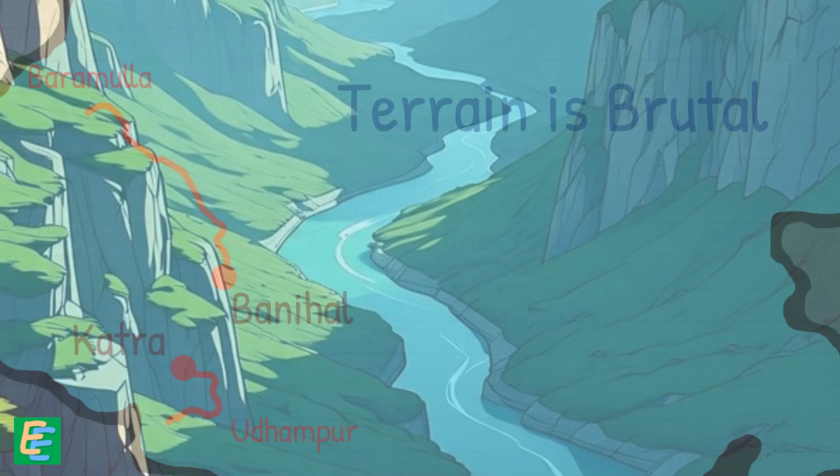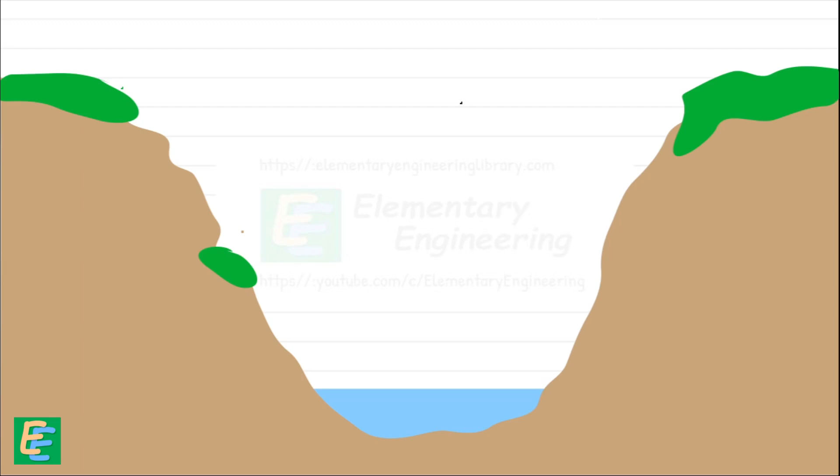The stretch between Katra and Banihal, where the terrain turns brutal. And right in the middle of that stretch, the Chenab River Gorge. Here, the river doesn't just flow, it slices deep into the mountains, carving a gorge nearly 360 meters deep. To give you an idea, that's taller than the Eiffel Tower.

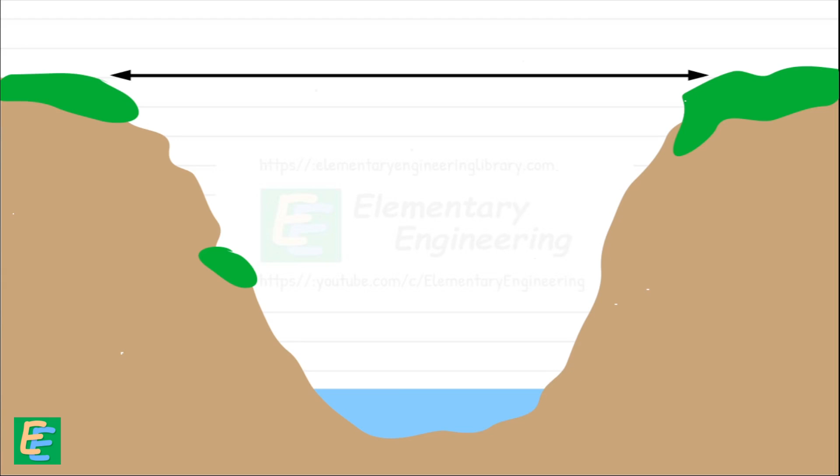And building a railway across that, across roughly half a kilometer, it was like staring into an unwritten chapter of engineering history. There was no feasible way around it. Every meter of rail laid, every tunnel bored, every other bridge constructed, all converged on this single unavoidable crossing. But it wasn't just the sheer mind boggling depth that made the site so difficult. It threw every possible natural obstacle at the engineers.

First, the geology here is incredibly complex and volatile. The entire region lies in an active seismic zone, meaning earthquakes are a very real threat. The rock here is fractured, unpredictable, and prone to landslides. Building foundations strong enough to stand for over a century in such unpredictable ground was a monumental task.

Then there was the weather. The region experiences extreme temperature swings, from intensely hot summers to brutal sub zero winters. And the winds? They can whip through that gorge at a speed of up to 266 kilometers per hour, strong enough to derail a train if not accounted for. Any structure here would need to be incredibly robust. And finally, the sheer remoteness of the location.

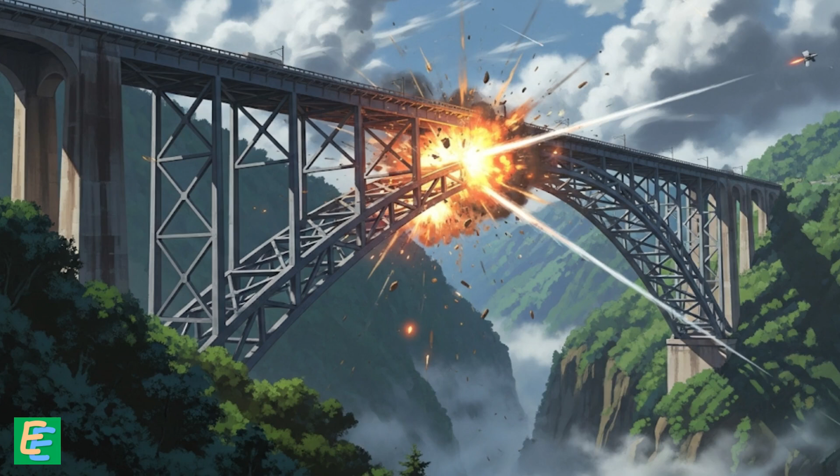This bridge lies in a geopolitically sensitive region, not far from the India Pakistan border. In the unfortunate event of a conflict, such a vital artery could quickly become a strategic target. So the bridge had to be designed not just to survive nature, but also sabotage or enemy attack. So the big question was, what kind of bridge could even survive here?

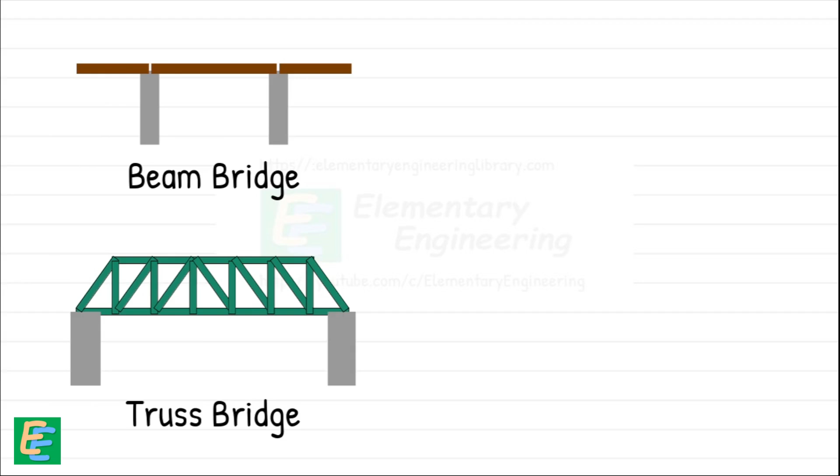Engineers explored all kinds of options available to them, meticulously studying every possibility, from the solid beam bridge and the interwoven truss bridge to the elegant suspension bridge and the modern cable stayed bridge. But nearly all of them shared one fatal flaw. They would have required immensely massive support piers or exceptionally tall pylons.

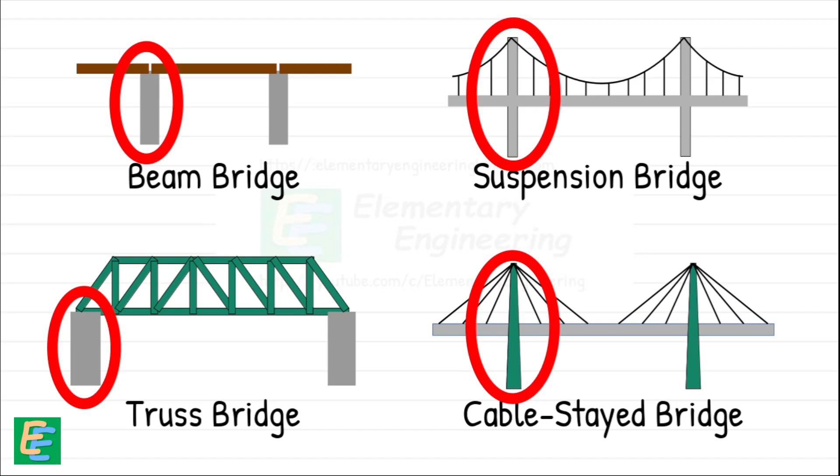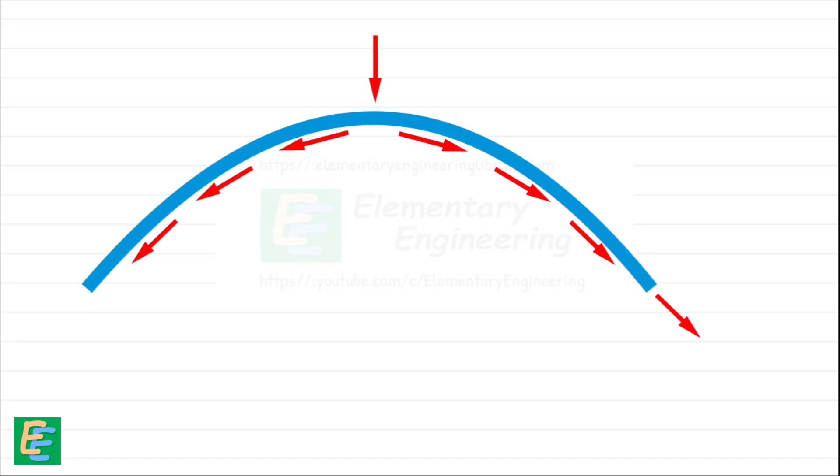So the engineers turned to a different, ancient, yet incredibly powerful structural form, the arch bridge. Why an arch? Well, an arch is a natural marvel of efficiency. Imagine placing a weight on the top of an arch. It efficiently channels that downward force along its curve, converting a significant portion of it into a powerful outward push, also called the thrust, at its base.

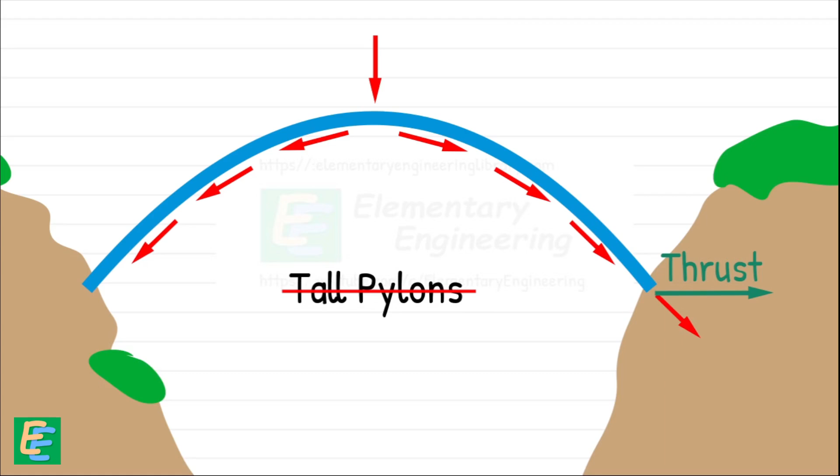This outward force then gets transferred into the sides of the gorge, right where the arch touches the mountains. That's the key. The arch doesn't need any support in the middle of the gorge. No tall pylons, no vulnerable piers. Instead, its entire weight is transferred into massive, reinforced foundation blocks called abutments built into the rocky wall on both sides.

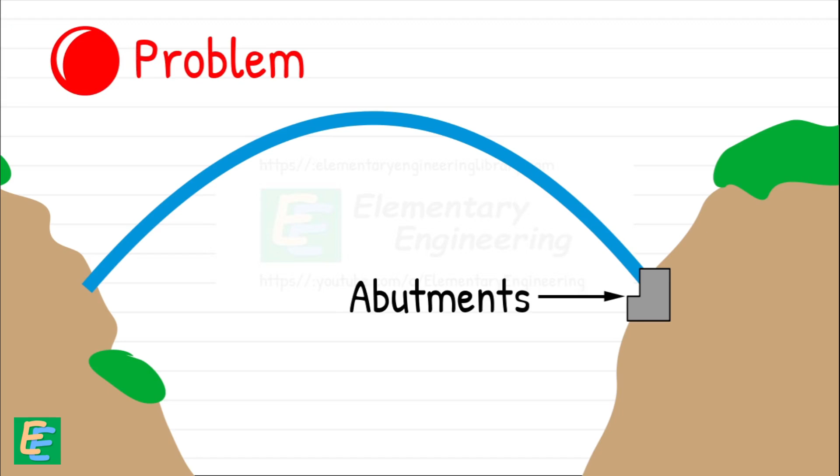But there was a problem. The gorge walls, which were supposed to hold up the entire structure, were not made of solid rock. They were fractured, layered, and geologically unstable. But the engineers, as always, had an idea. And so the extraordinary construction of the Chenab River Arch Bridge began.

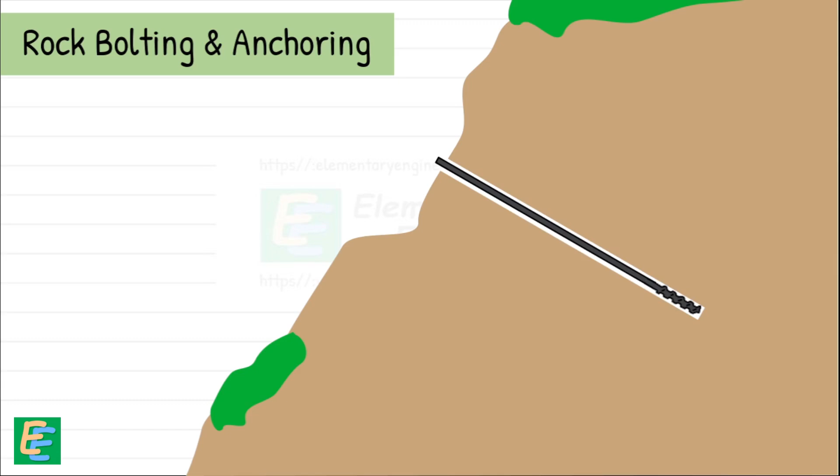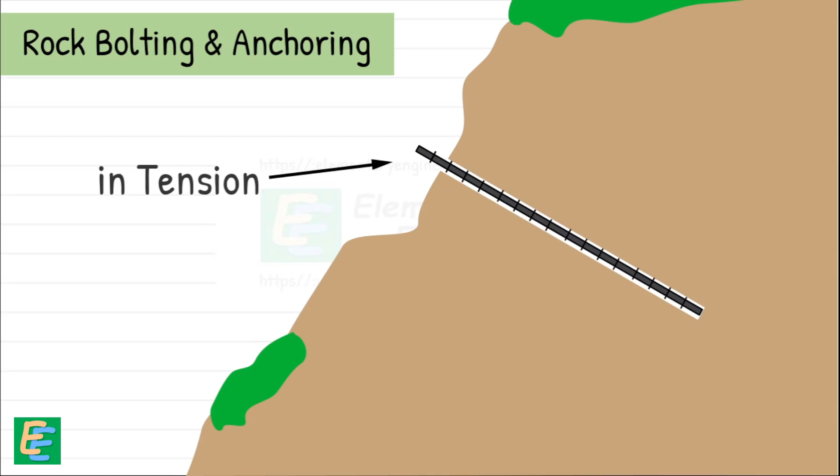Engineers began by creating a stable foundation for the bridge. They basically employed three main techniques to stabilize the fractured rock wall. First, they used rock bolting and anchoring. Engineers drilled deep into the fractured rock, sometimes up to 30 to 50 meters, and inserted high strength steel rods. These rods were stretched, so they were in tension, and then permanently grouted in place.

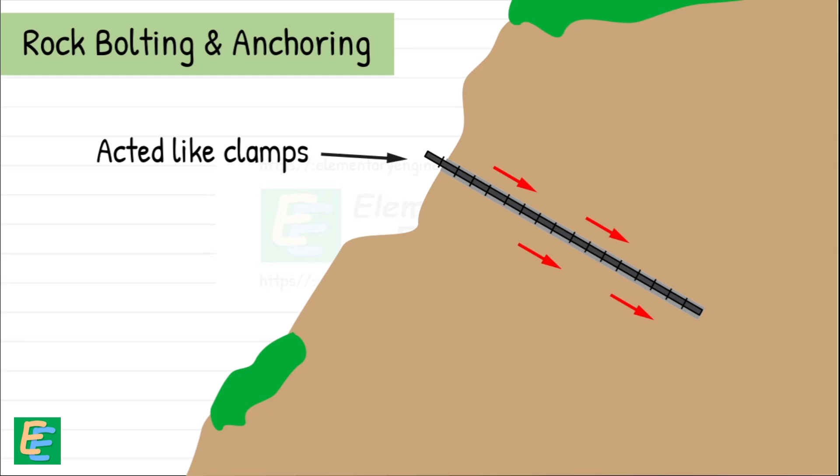Once released, they acted like powerful clamps, pulling loose layers of rock together and making the entire rock mass significantly stronger. Second, they implemented grouting. This involved injecting a special cement based mixture known as grout under high pressure into every tiny crack and fissure within the rock. This grout fills all the voids, binding the fractured rock together into a far denser, stronger, and more unified block.

Third, for the exposed surfaces, they applied layers of steel mesh and then sprayed them with a special concrete applied at high velocity called shotcrete. This created a protective skin, preventing further erosion and weathering.

But wait, did you wonder how engineers even got materials and machinery to a near vertical gorge face, hundreds of meters above the river? That too was one of the major challenges they faced. Before any actual construction could begin, they had to solve this basic problem of access.

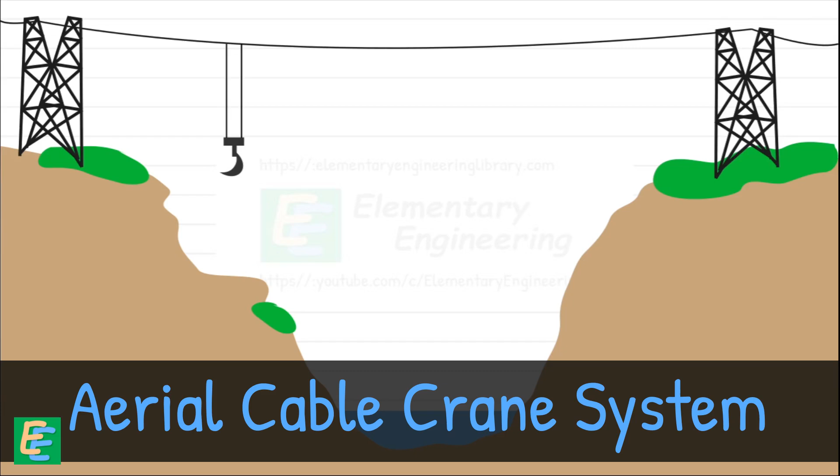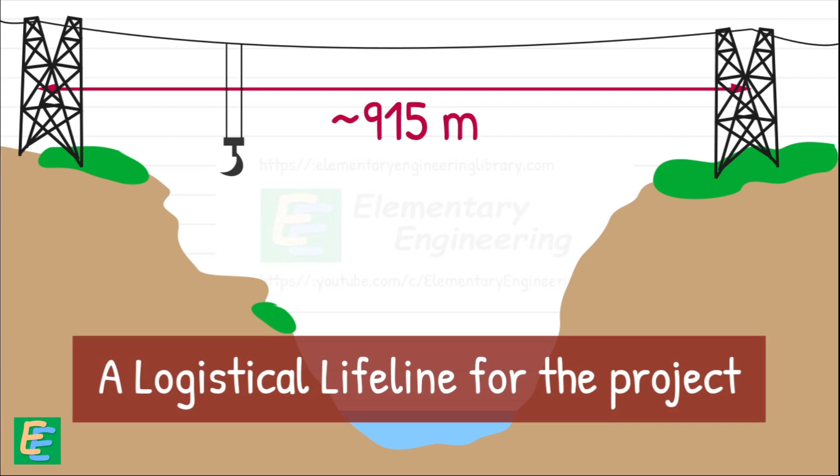To solve this, they installed a temporary aerial cable crane system across the gorge, spanning nearly 915 meters. This cable crane became the site's logistical lifeline, delivering everything from rock anchors and grout to rebar, scaffolding, and formwork.

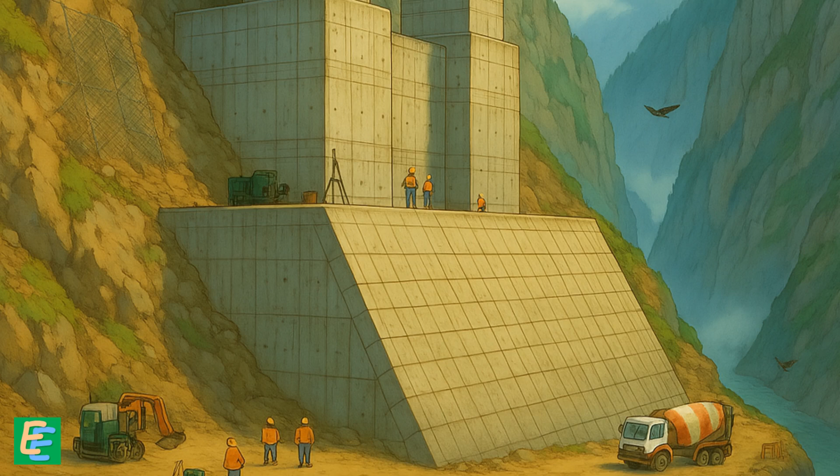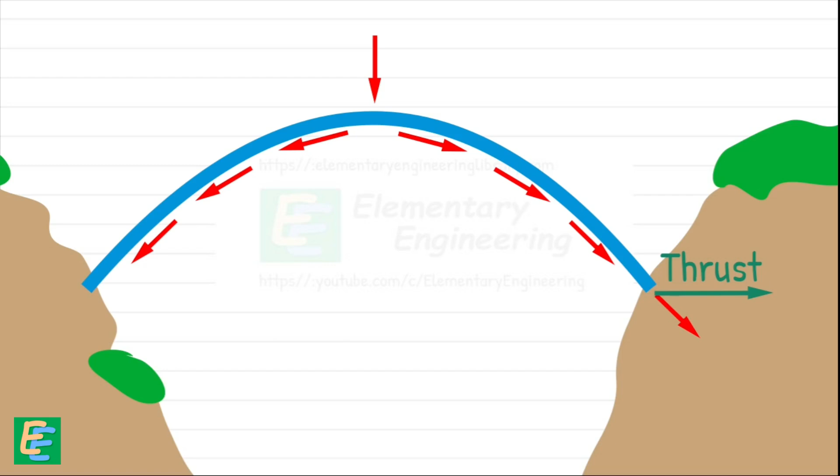Once the gorge walls were stabilized, the next step was to build the abutments, the massive foundation blocks at either end of the arch. These aren't just supports, they are the points that absorb the enormous outward thrust of the arch and transfer it deep into the mountain. To achieve this, engineers excavated large pits into the strengthened sides of the gorge.

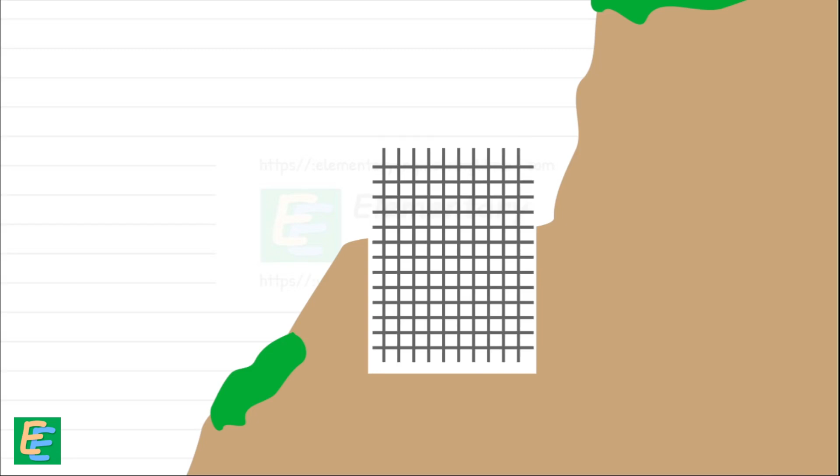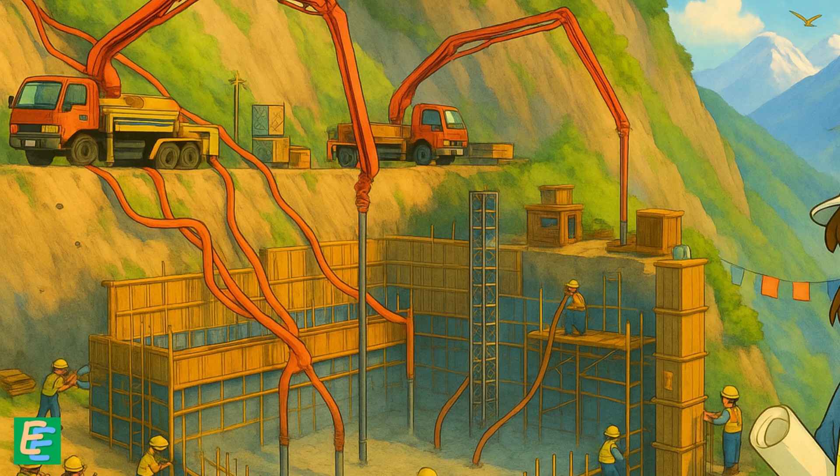Dense cages of steel rebar were meticulously assembled inside, forming a rigid skeletal framework. Then, using high pressure pumps and pipelines, high strength concrete was poured layer by layer into these forms, creating the stable foundations the arch and the other piers would eventually rest upon.

Next, engineers constructed a series of tall, straight vertical steel piers rising from the abutment zones. They were built first because they had a crucial job to do during the construction of the arch.

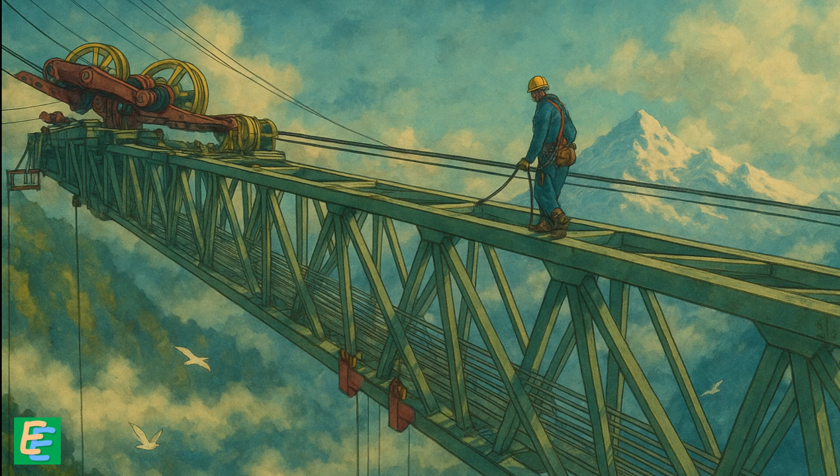Now the time had arrived to build the arch itself. But how do you build something so immense, high in the air with no support from below? For this, engineers turned to a method called cantilever construction. They started building the arch outward from both sides, little by little, until the two halves would finally meet in the middle.

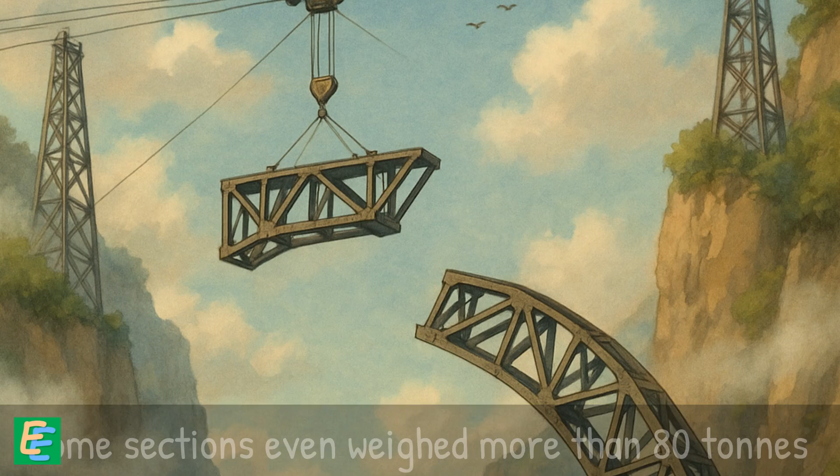From both ends, prefabricated steel truss segments were lifted using the cable crane system and assembled section by section. Some of these sections weighed more than 80 tons. Once in place, they were held by temporary stay cables anchored to the previously erected piers and to the slopes above. Each section had to be perfectly aligned, then welded or bolted with incredible precision.

For nearly 5 years, these two halves of the arch slowly crept towards each other. And finally, on April 5th of 2021, the final segment was inserted at the crown. The two ends locked together and the structural arch was complete. In the next phase, vertical steel members called spandrel columns were installed, followed by the bridge deck itself. Finally, the railway track was laid atop this platform.

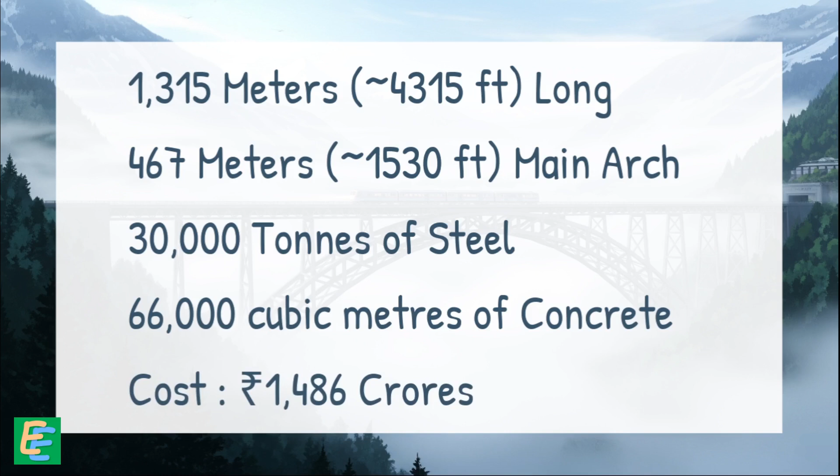With that, a 1,315-meter long bridge featuring an iconic 467-meter main arch span, built with an incredible 30,000 tons of steel and anchored by 66,000 cubic meters of high strength concrete, and that cost around 1,486 crores of Indian rupees or nearly 180 million US dollars, was finally ready. An idea once thought impossible now stood in solid steel.

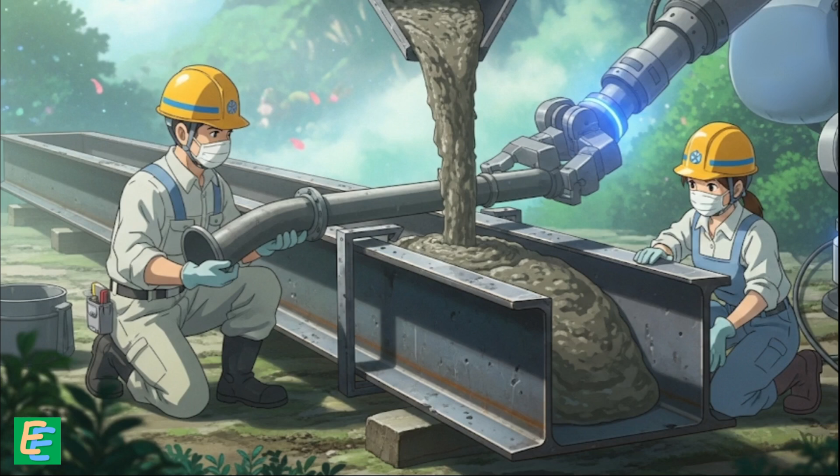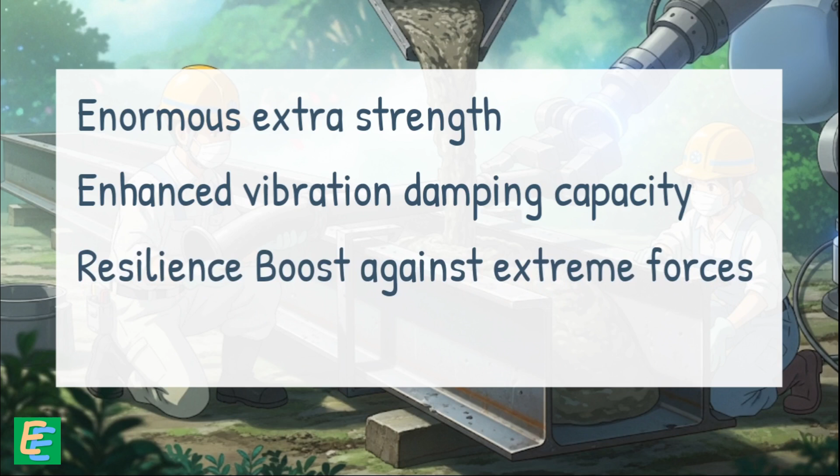But here is what makes it even more extraordinary. The Chenab Bridge wasn't just built to stand tall, it was built to survive the unthinkable. The steel arch itself isn't hollow. Its massive ribs are filled with concrete inside, giving it enormous extra strength, enhanced vibration damping capacity, and significantly boosting its resilience against extreme forces like blasts or fire.

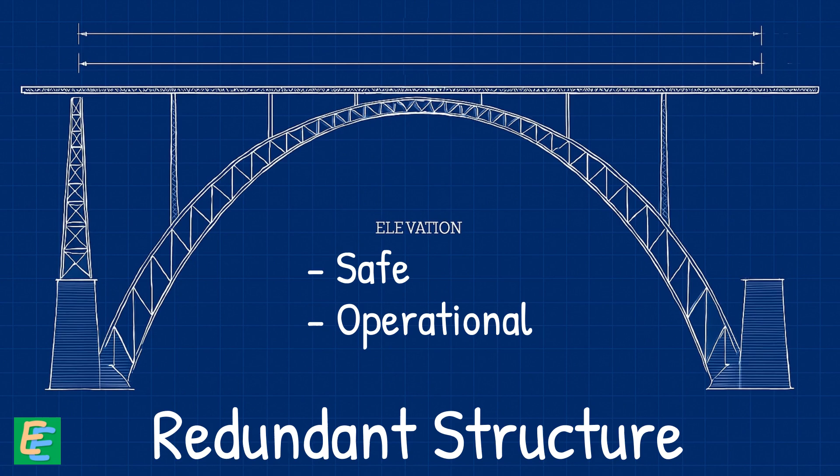And the entire structure was designed with redundancy, meaning if one component fails, others can carry the load and the bridge will still be safe and operational. Even the paint isn't ordinary. It's a special corrosion resistant coating developed to last 15 to 20 years, shielding the steel from the extreme Himalayan weather.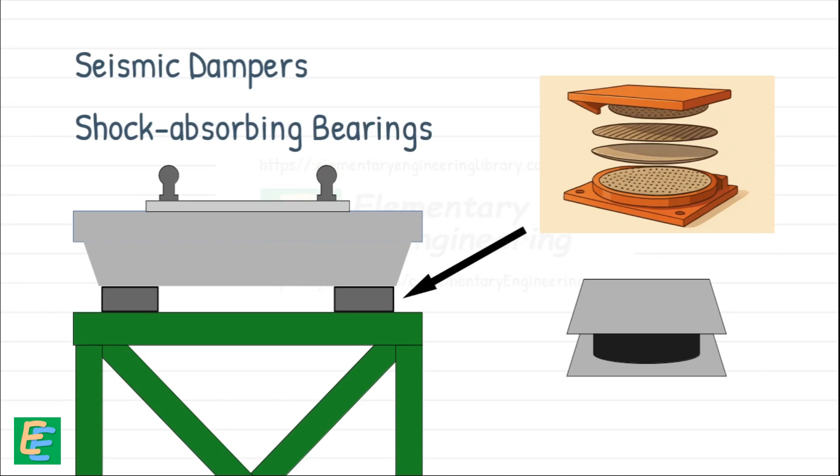Also, the region lies in seismic zone 5, the highest risk earthquake zone in India. So the bridge uses seismic dampers and shock absorbing bearings to handle vibrations. Including that, the arch shape itself helps distribute loads more efficiently, naturally improving earthquake resilience.

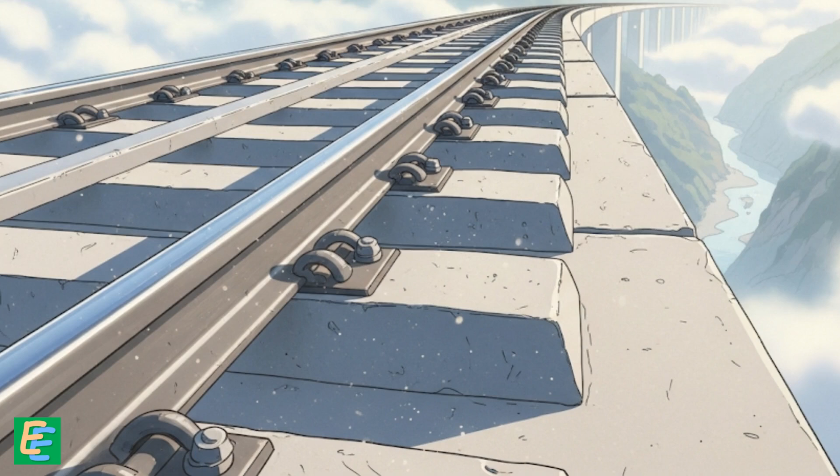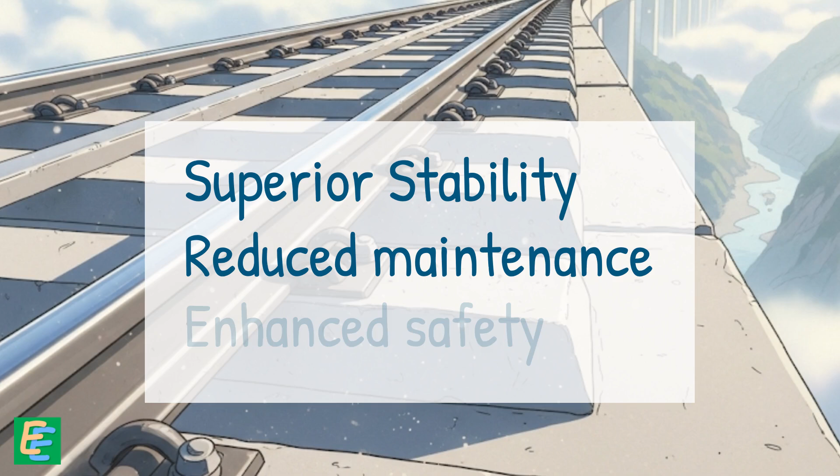And for the railway track itself, they employed a modern zero ballast system. This means there is no traditional ballast or crushed stones underneath. Instead, the tracks are directly fastened to the concrete deck, offering superior stability, reduced maintenance, and enhanced safety on this critical high speed link.

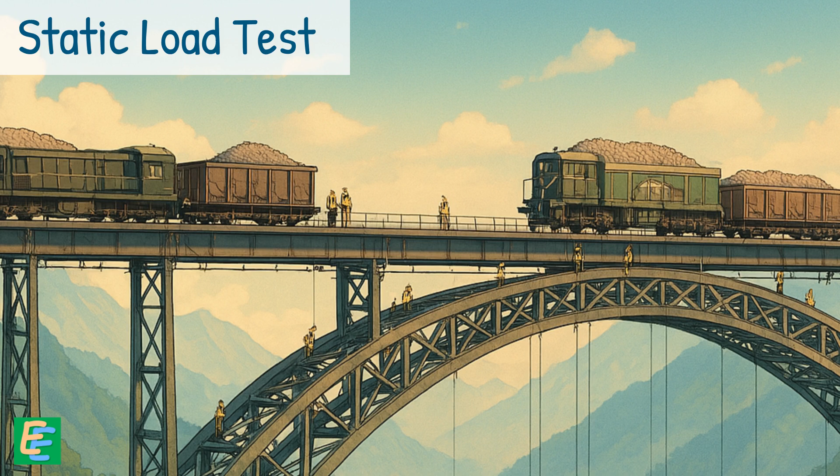But before any train could even cross it, the Chenab rail bridge had to prove itself. Engineers carried out an intense series of tests because a structure this daring in a location this harsh can't just look strong. It has to perform under real world stress. First came the static load tests. Massive weights were placed on different sections of the bridge to simulate the pressure of passing trains, checking for any sign of bending, shifting, or stress.

Then came dynamic load tests, using actual locomotives moving at different speeds to observe how the bridge responds to the motion, vibration, and sudden load changes. And it passed every test. From the foundation bolts to the crown of the arch, the bridge held steady. No surprises, no cracks, no weakness.

And on June 6th of 2025, the Chenab rail bridge officially opened to traffic, completing one of the most ambitious chapters in Indian railway history. It wasn't just an engineering achievement, it was a message that no mountain is too high, no gorge is too deep, and no terrain too unforgiving when the will to connect people is stronger than the obstacles that divide them.